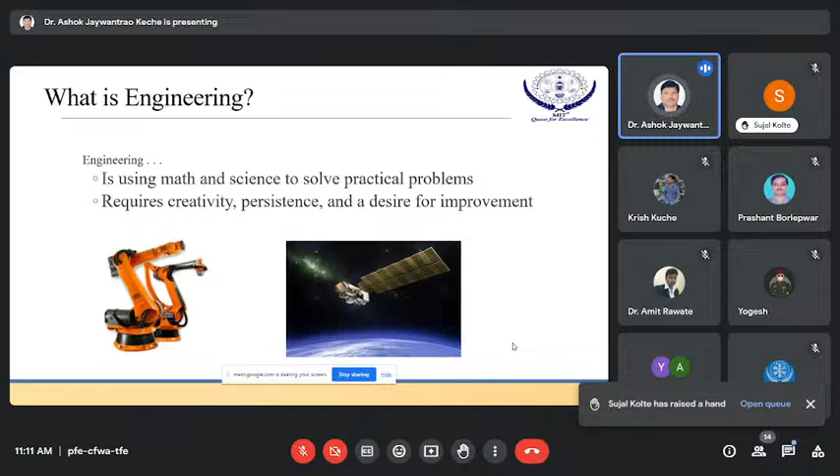Basically, engineering is nothing but science. It is using math and science to solve practical problems of the industry, society, and individual problems also. It requires creativity, persistence, and a desire for improvement.

Let us understand the difference between engineering and engineering technology. My dear friends, in engineering more mathematical equations and mathematical knowledge are required, whereas engineering technology is more related to the technology and industry related knowledge, meaning less mathematics knowledge is required.

In engineering, the first component is research. Research is nothing but the byproduct of any education institute, whether that is the UG program or the PG program. The second component is the complex analysis.

Means if you want to solve the problems of the society and industry, we need to understand the problems, and after understanding it, we have to design a solution for a particular problem by analyzing the complex engineering problem and its analysis. Then for that purpose, some design is required to solve the engineering problem or the industry or society problem, where some mathematical equations are required to solve and design a complex engineering solution.

Then the next step is development. Development is required for the betterment of the component of the engineering system. If you want to modify the existing system to satisfy the customer's needs, wants, and requirements, development plays a vital role.

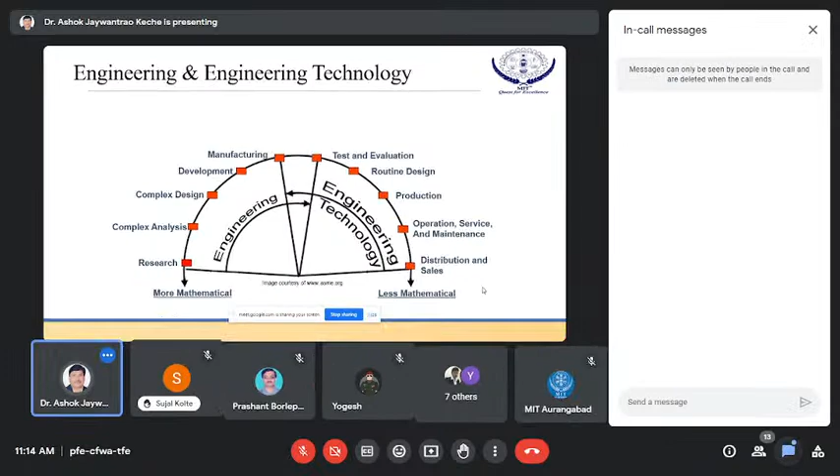Production means conversion of raw material into finished product by performing certain operations on it. Then there are various operations to be performed on a specific component or system to fulfill the particular requirement, and then service and maintenance, and finally distribution and sales.

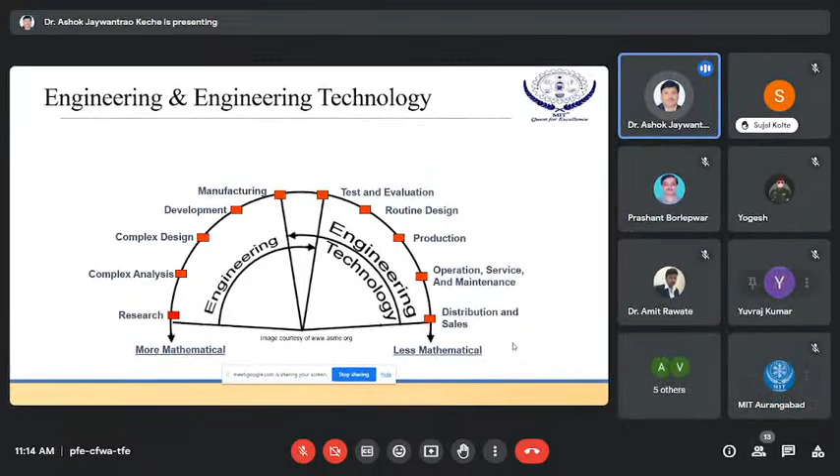As we know, there are various engineering disciplines: aerospace, agriculture engineering, biomedical engineering, chemical engineering, civil engineering, computer hardware engineering, electrical engineering, electronics engineering, environmental engineering, health and safety engineering, industrial engineering, marine and ocean engineering, materials and metallurgy engineering, mechanical engineering, mining engineering, geological engineering, nuclear power engineering, and petroleum engineering.

So what is mechanical engineering? As I said earlier, the mechanical engineering discipline is divided into three subdomains: manufacturing, design, and thermal. Research plays a vital role in any engineering discipline, and in mechanical engineering especially, while designing vehicles—two-wheeler or four-wheeler—and designing machines. For that purpose, we need research based on various activities: first research, then development, then design, manufacture, and maintain devices that produce or consume power. You might come across various terms: designing cars, determining new uses for lasers, maintaining power producing equipment such as wind turbines, solar, power mills, and building production machines.

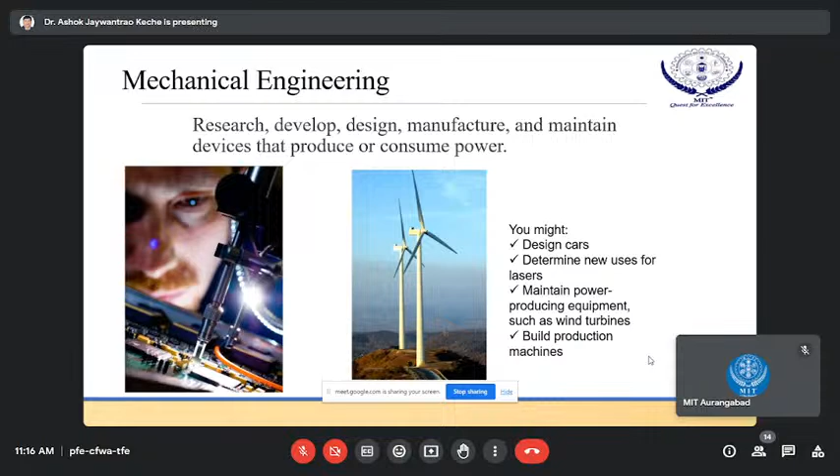Then why do we have to choose mechanical engineering? That is the biggest question among students or aspirants who want admission in mechanical engineering. As per the National Association of Software and Service Companies, mechanical engineering jobs are expected to grow from 9% to 11% by the year 2026. And presently, according to Ambition Box, the average annual salary of a mechanical engineer in India is around rupees 3.6 lakh per annum.

On the Global Manufacturing Competitiveness Index rankings by country, India is expected to rise 6 places, resulting in creating new opportunities for mechanical engineers. This information pertains especially to freshers of mechanical engineering. Mechanical engineering jobs are among the best engineering jobs today, as well as the 11th best STEM job according to US News—science, technology, engineering, and maths—with many multinational companies establishing research and development facilities in India, and unprecedented infrastructure development taking place nowadays. So the profession of mechanical engineering is still going to be on the rise in the near future.

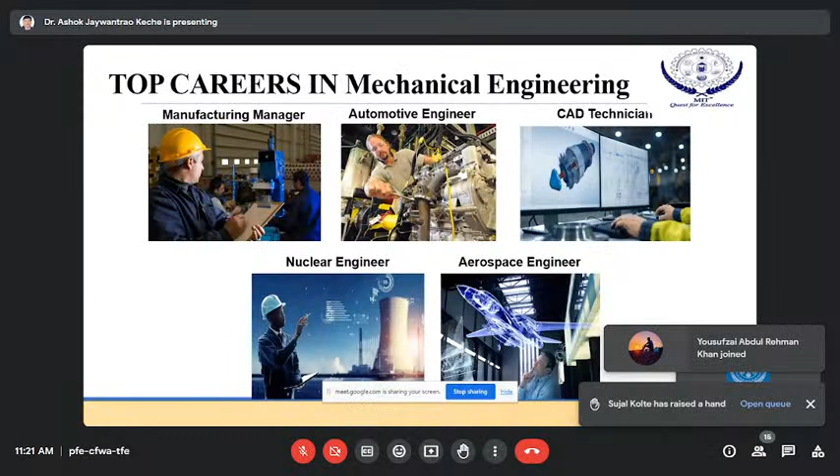Then aerospace engineering—what are the expectations from an aerospace engineer employed in the aerospace industry? Aerospace engineers design, build, and test aircraft, missiles, and systems for national defense, spacecraft, etc. They ensure that all blueprints, prototypes, and products meet the required engineering standards, environmental issues, and consumer demands.

Then maintenance engineering—here we have to do maintenance of all types of equipment and machinery. The job of a maintenance manager or engineer is to ensure that industrial machinery and equipment run smoothly and give reliable results. A maintenance engineer plans and undertakes scheduled maintenance, responds to breakdowns, diagnoses faults, does repairs, and supervises engineering and technical staff.

Nowadays, total productive maintenance—the philosophy of zero—is very popular in the automotive industry, wherein zero rejection should be there, zero breakdown, zero maintenance, like that.

And the robotics expert - this is also very important as far as the engineering field is concerned. Then controls and instrumentation engineering also plays a vital role in mechanical engineering. A control and instrumentation engineer ensures that all the equipment and machinery in the industry sector work safely and effectively.

They either work on a factory floor, in an office, in a laboratory, or all three. Their job role includes preparing and agreeing project budgets, timescales, and specifications with clients and managers. A skilled instrumentation engineer is in high demand in the private sector.

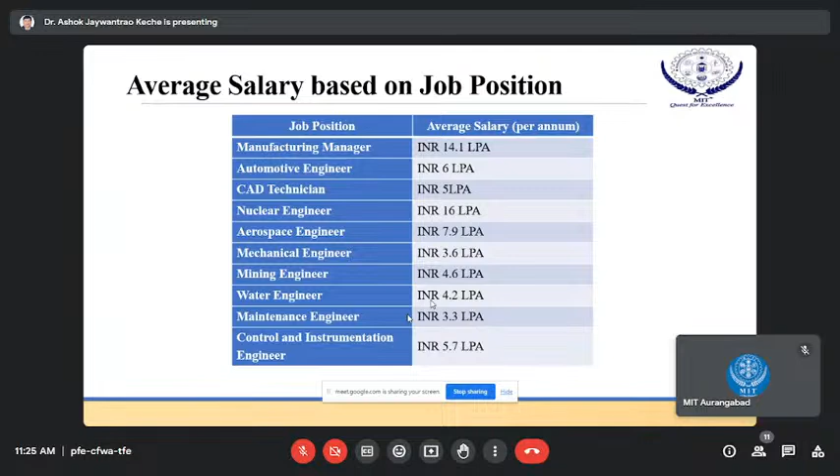Now let us discuss the facilities and infrastructure available at the Mechanical Engineering Department, Maharashtra Institute of Technology, Chhatrapati Sambhajinagar.

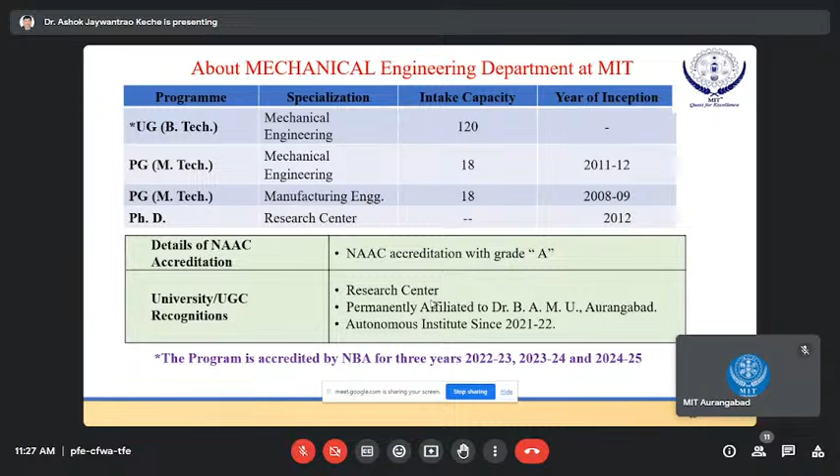This first particular slide gives you overall brief information about the department. At present we have 46 faculty members. Out of 46 faculty members, 15 have completed their PhDs from reputed institutes like IITs, NITs, government colleges, and other reputed institutes. 8 faculty members are pursuing their PhDs from reputed institutes like IITs, NITs, and government colleges.

2 of our faculty members have also completed their PG from foreign universities. Faculty-wise, the Department of Mechanical Engineering is very rich. We have 16 faculty members with more than 20 years experience, 14 faculty members with more than 10 years experience, and 8 faculty members with more than 5 years experience.

As I said earlier, we have a research center at our department. There are a total of 51 research scholars working at our department, and we have 8 supervisors to guide the research scholars in various domains of mechanical engineering such as manufacturing, design, thermal, and materials.

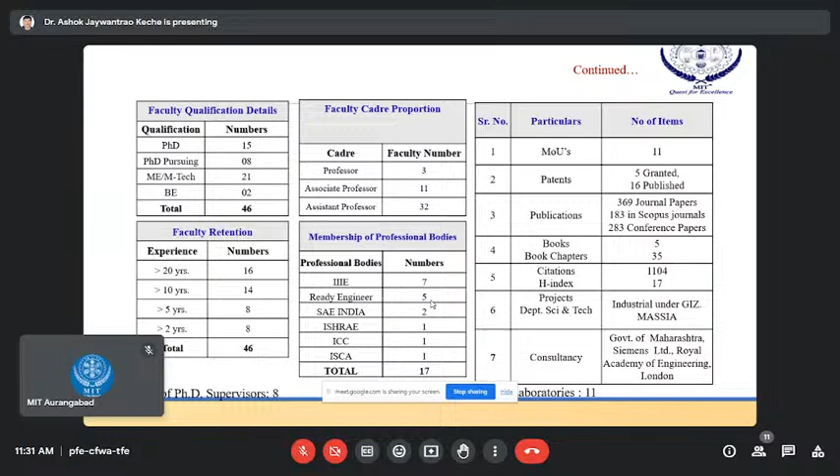The mission of our institute is: we are committed to provide wholesome education in technology and management to enable aspiring students to utilize their fullest potential and become professionally competent and ethically strong, by providing well qualified, experienced, and professionally trained faculty, state of the art infrastructure, facilities, and a conducive learning environment for research and development, and delight to all stakeholders.

My dear friends, as I said earlier, at present we have 46 well qualified faculty members at our department, and we also have various facilities and state of the art infrastructure available. We have 11 laboratories and 3 centers of excellence at our department.

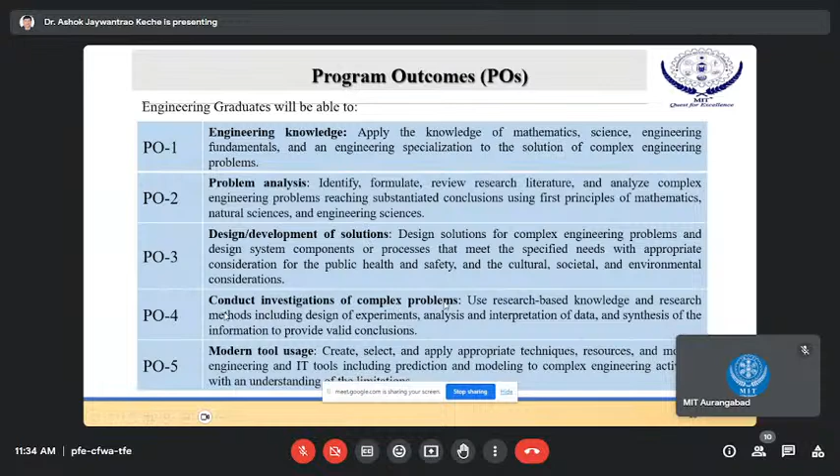The first program outcome is engineering knowledge. Second, problem analysis. Third, design and development of solutions. Conduct investigation of complex problems. Modern tool usage. Then engineer and society. Environment and sustainability. Ethics, individual and teamwork. Communication, project management and finance. And the last one, lifelong learning.

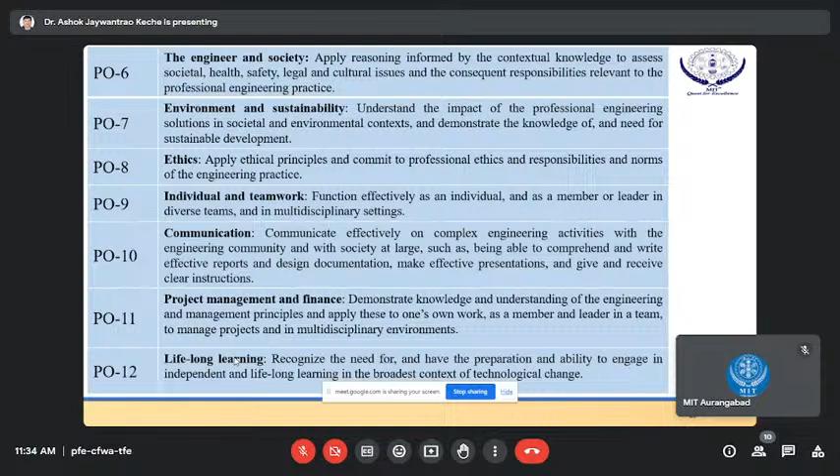So while drafting the program educational objectives, main emphasis is given to skill, attitude, and knowledge. These are the three important parameters that students need to understand.

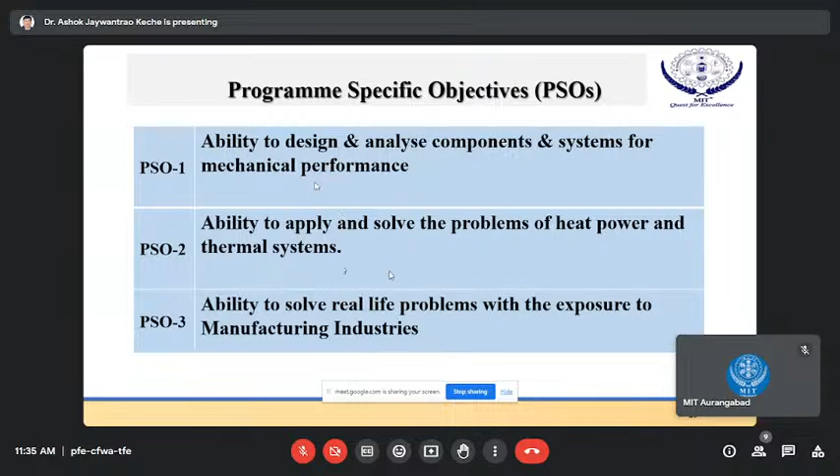Second, ability to apply and solve the problems of heat power and thermal systems, related to thermal engineering. The next one is ability to solve real life problems with exposure to manufacturing industry, related to the manufacturing or production domain.

My dear friends, our department is continuously working for the overall development of the students, and these are the few steps we have followed for the last 7-8 years for overall development of the students.

That is training and placement. This facility is available at central and department level, through which we organize campus placement drives, off-campus drives, and training programs to our students. Training and placement activities are carried out at department and institute level.

We are also organizing soft skill development programs and communication skill programs for overall development of the students. And at our department, we are following various best practices, the first of which is the teacher and guardian scheme.

Let me tell you about the teacher and guardian scheme, where 20 students are allotted to one teacher to take care of their academic and personal problems. Online training facility is also available at our department, with exposure for students and faculty to solve industry-related problems under the aegis of GIZ and MASSIA.

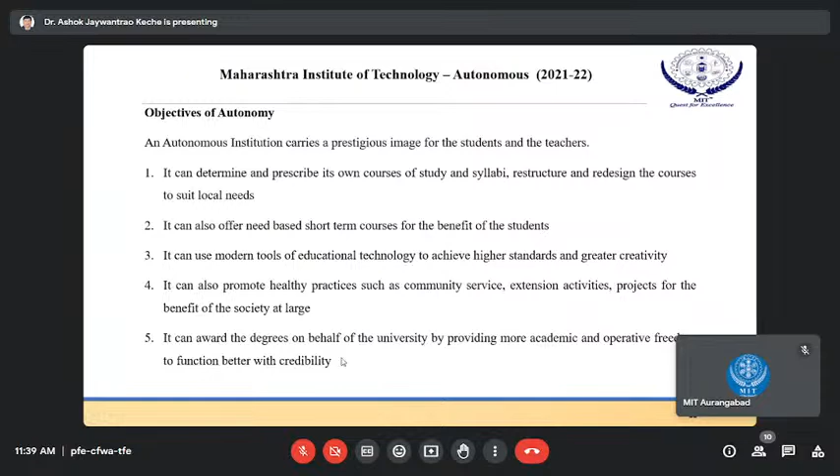My dear friends, in brief, autonomy reflects efforts for excellence in the academic performance of students, the capability of self-governance, and enhancement in quality education.

This slide highlights the benefits of an autonomous institute, meaning academic freedom. We have the freedom to revise the syllabus as per the requirements of industry and society. There is also a choice-based credit system, which is available at autonomous institutes.

Employability becomes easier, and more placement opportunities are available in both government and private sectors. Regarding examinations, I am happy to inform you that under this autonomous institute, we declare results within 7 to 8 days.

There is also a facility available related to makeup examinations, meaning if a student fails in one or two courses, he can reappear for that particular course within 15 days. Internship facility is also available for one complete semester.

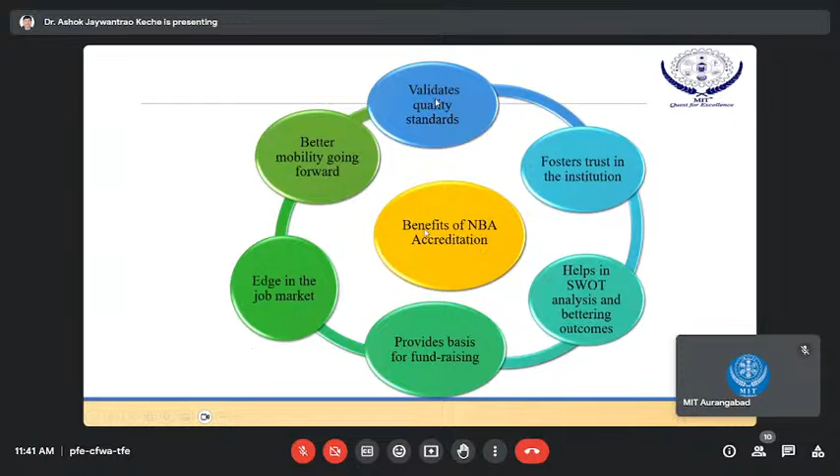As I said earlier, our UG program is NBA accredited. Let us try to understand the benefits of an NBA accredited program. It validates the quality at national and international level, fosters trust in the institution regarding the various programs, helps in SWOT analysis - that is strength, weakness, opportunity, and threats - and leads to better outcomes.

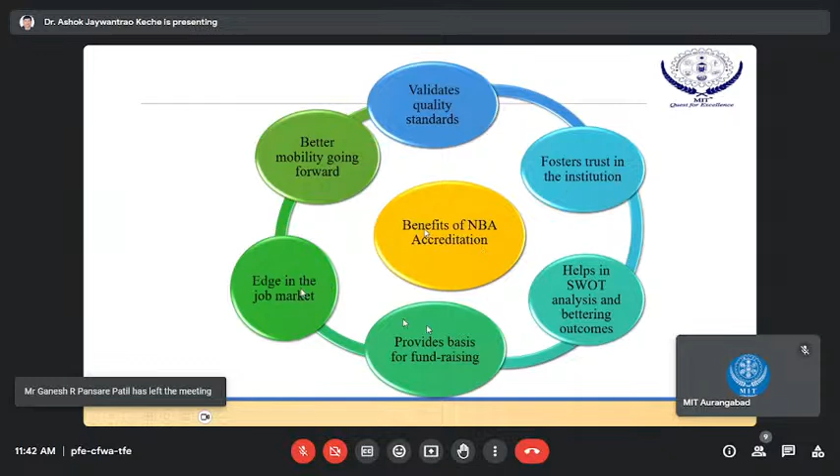It provides a basis for fund raising, meaning our students and faculty can apply to various fund raising institutes and government funding agencies, and it helps in the job market, meaning a lot of jobs are available for mechanical engineering students because of this NBA accreditation and autonomous institute status.

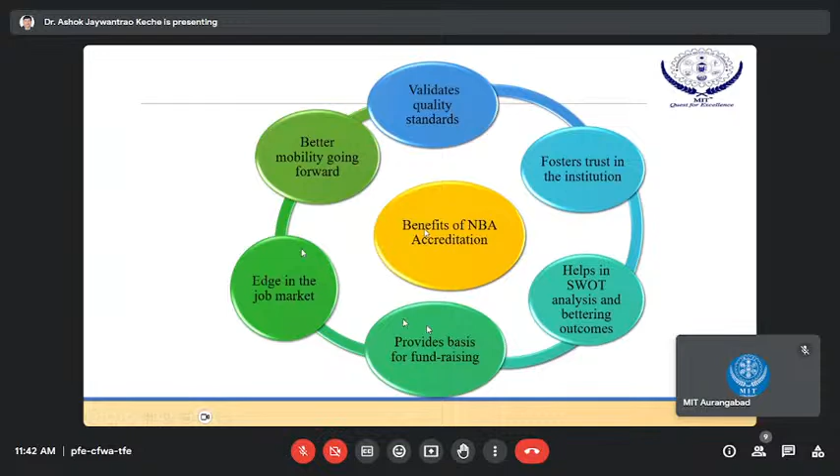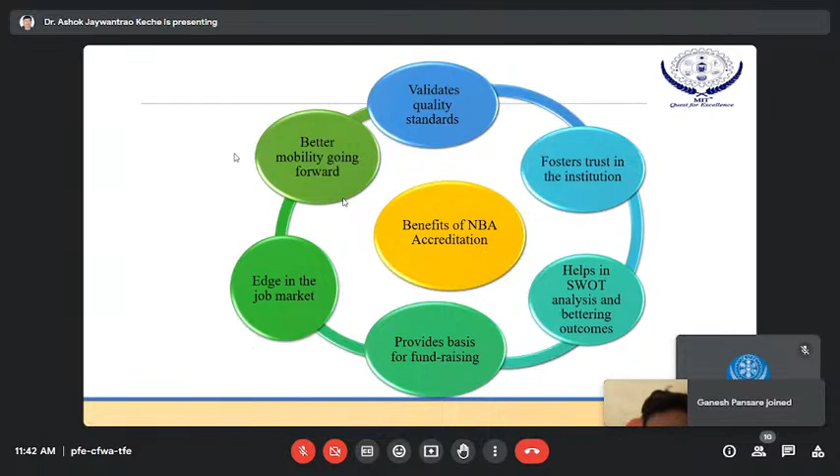And there is better mobility going forward, meaning students who want to pursue higher education from foreign universities will get an added advantage if they want to pursue their MS degree from foreign universities.

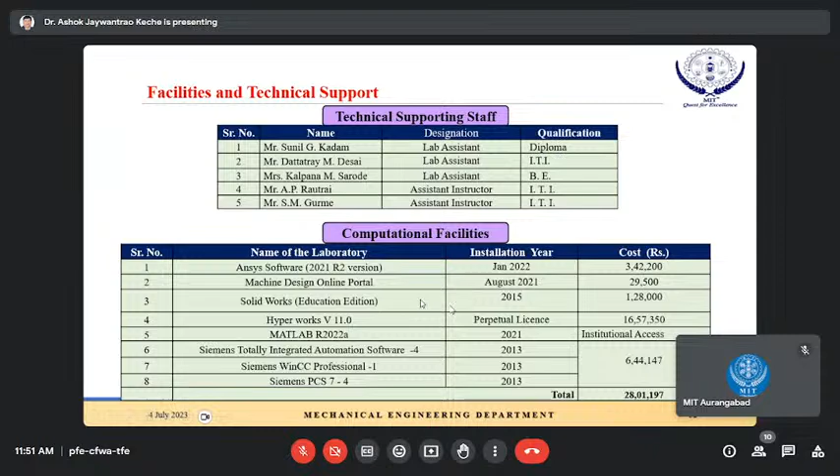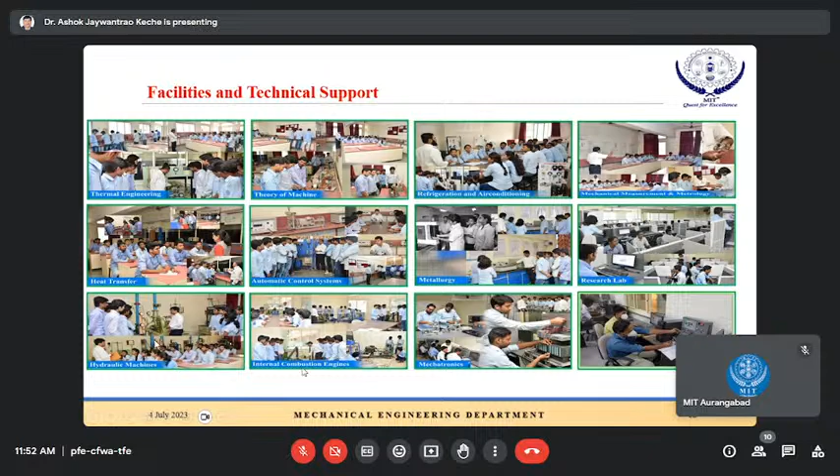This is a snapshot of the various laboratories of the mechanical engineering department: thermal engineering, theory of machines, refrigeration and air conditioning, mechanical measurement and metrology, heat transfer, automatic control system, metallurgy research lab, hydraulic machine lab, internal combustion engine lab, mechatronics lab, robotics lab, workshop, and additional facilities.

That is also mentioned in this particular slide. CNC turning center and 3D printing facilities are also available.

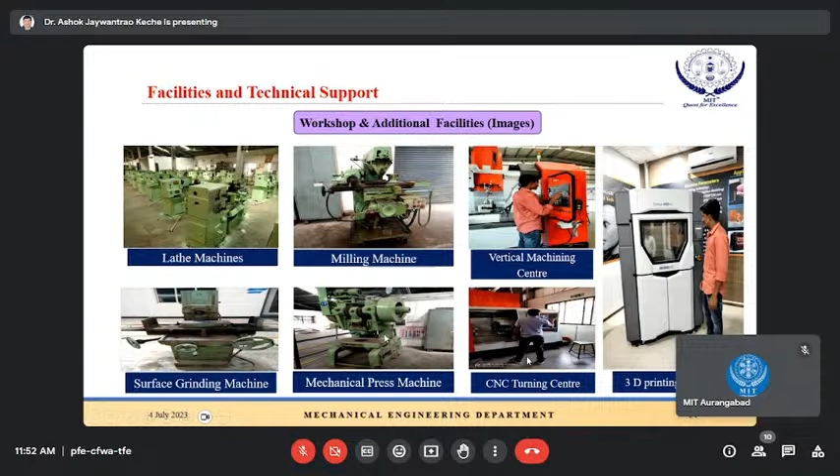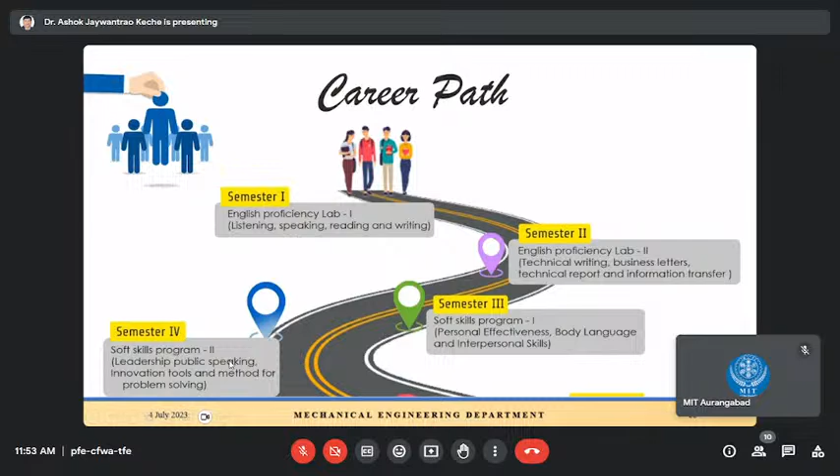We have designed a career path for first year mechanical engineering students starting from the first semester itself. In semester one, English proficiency lab; semester two, English proficiency lab two; semester three, soft skill program covering personal effectiveness, body language, and interpersonal skills; and semester four, soft skill programs on leadership, public speaking, innovation tools, and methods for problem solving.

In semester 5, aptitude training program and winter internship for 3 to 4 weeks. In semester 6, aptitude training program and winter internship for 3 to 4 weeks. In semester 7, mock aptitude test, mock interview, and mock group discussion.

In the last semester, there is a choice-based track where students can opt for one track from internship, research project, or entrepreneurship development. So these are the three choice-based tracks: entrepreneurship, higher education, and job placement.

As I said earlier, we are different. How so? This slide highlights how we are different from other institutes, and how we differ as a department compared to others, as we have a recognized center for Ph.D. in mechanical engineering.

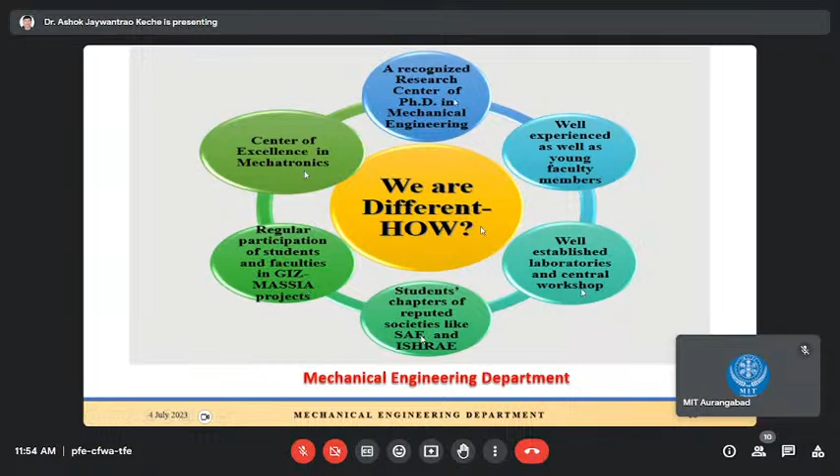We have well experienced as well as young faculty members, well established laboratories, and central workshop facilities are also available. Student chapters of reputed bodies are also there: ISHRAE, Society of Automotive Engineers, with regular participation of students and faculty in GIZ and MASSIA projects, and Centers of Excellence in mechatronics, robotics, and materials engineering.

These are the best practices we follow in our department: plant training for B.Tech final year students, active student participation in professional bodies like SAE India and ISHRAE, the Ready Engineer program for Tata Technologies, expert talks by industry persons and alumni, teacher guardian scheme, participation in national level engineering exhibitions like Technology Meet, Advantage Maha Expo, IM Tech, innovative and research projects, and learning through massive online courses like NPTEL, Coursera, VLabs, etc.

As I said earlier, our students regularly participate in the SAE competition. So to get a feel of this particular competition, I request all the students to please watch this video so that you will get the feel about that particular competition.